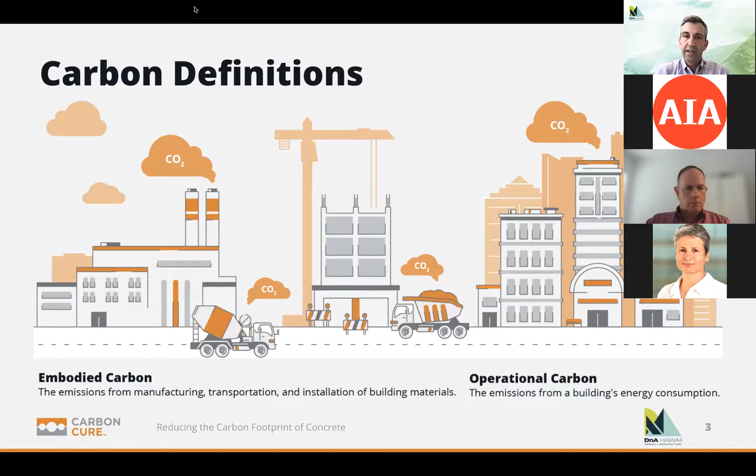And these CO2 emissions have largely been overlooked, and their proportion of the building's overall carbon footprint will continue to rise as we make more and more progress on operational carbon. And that's really where Carboncure is focused, helping construction decarbonize the embodied CO2 emissions, which tend to be some of the harder to abate emission reductions of buildings. So before I begin, I'd like to start off with a quick video made by our good friend Bill Gates that provides more visuals of Carboncure and what exactly we're doing. So please enjoy.

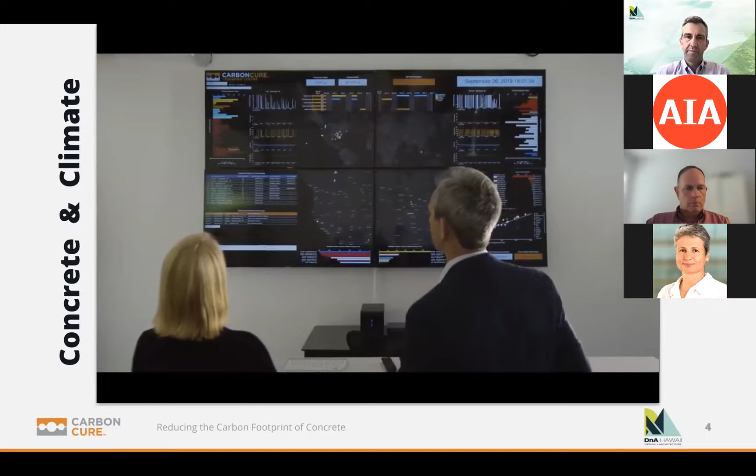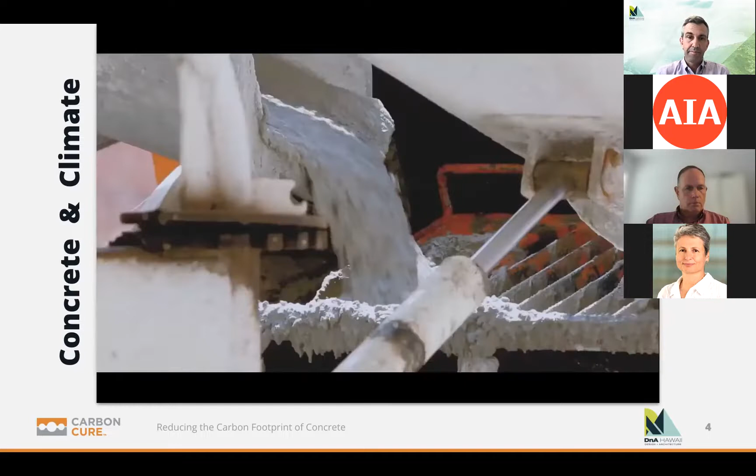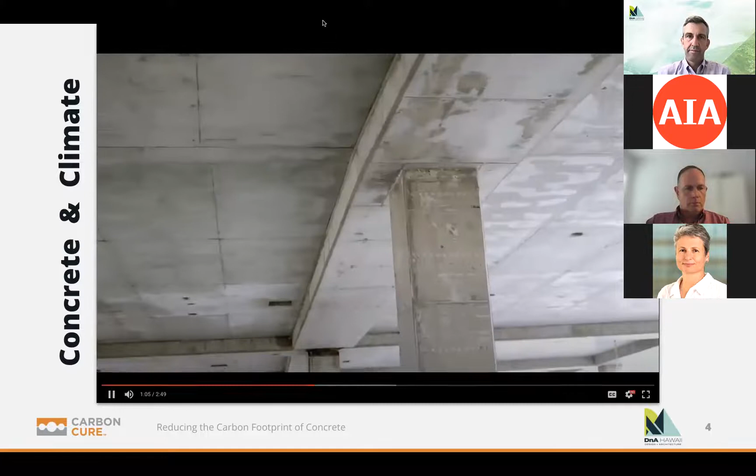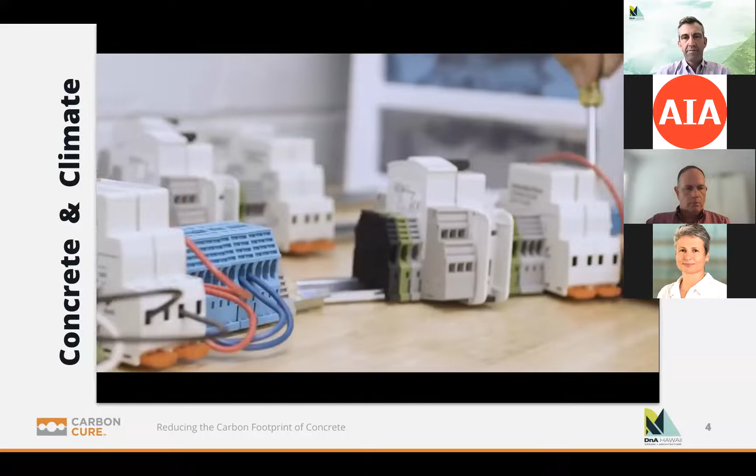The world is expected to add more than 2 trillion square feet of new building space by 2060. That's the equivalent of adding another New York City every month for the next 40 years. Many of these buildings will be made using cement, a massive emitter of greenhouse gases. But a company in Canada discovered an innovative way to reduce cement's carbon footprint. The effects of climate change are going to happen. We're seeing it every day, but this is a solvable problem. Our industry can decarbonize. Cement is the glue, the active ingredient in making concrete, and is the product that we build modern society with. People often ask, what is the difference between cement and concrete? Cement is really the chemistry behind concrete. A simple analogy would be if you're baking a cake, the flour would be the cement, and the cake would be the concrete, the finished product. To make cement, you dig up limestone from the ground, and then you run that through a kiln. Each pound of limestone that you put into this kiln, 1/2 goes up into the atmosphere as CO2. Carboncure is a technology company helping concrete producers transition into the new low-carbon economy. We developed a technology that bolts on to an existing concrete plant. We're starting with a greenhouse gas, a harmful waste product, and we're turning that into value.

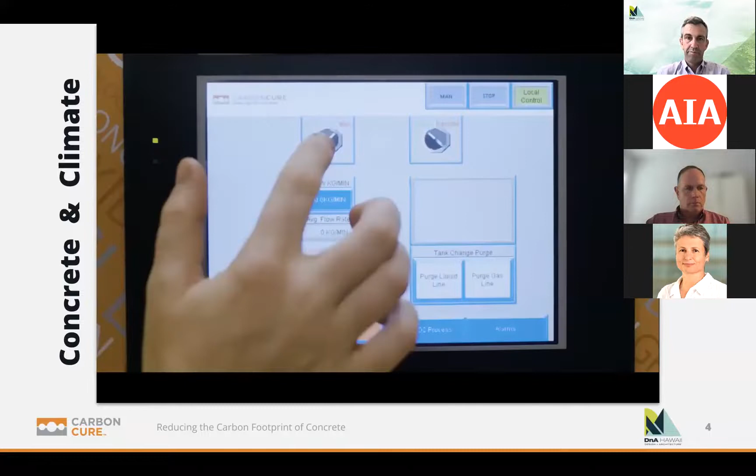We add a small amount of CO2 to react with the chemistry from cement that allows you to create a higher strength concrete. Carbon utilization is not just some abstract idea. It's not just happening in the lab. It's happening in the real world. The concrete industry has worked for years on sustainability, and so now we're looking for new technology.

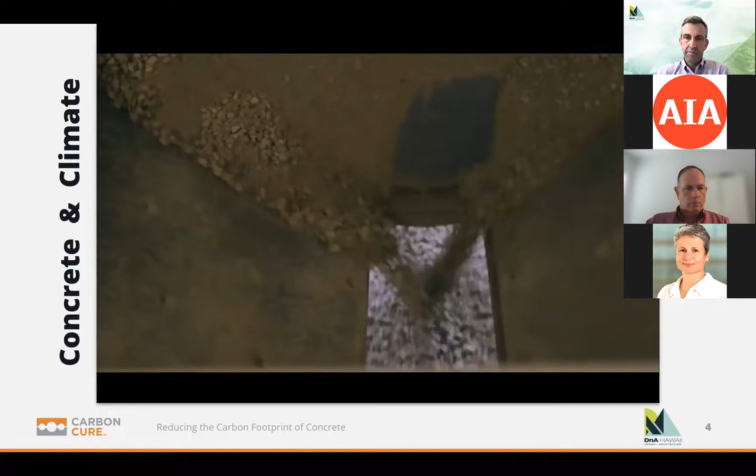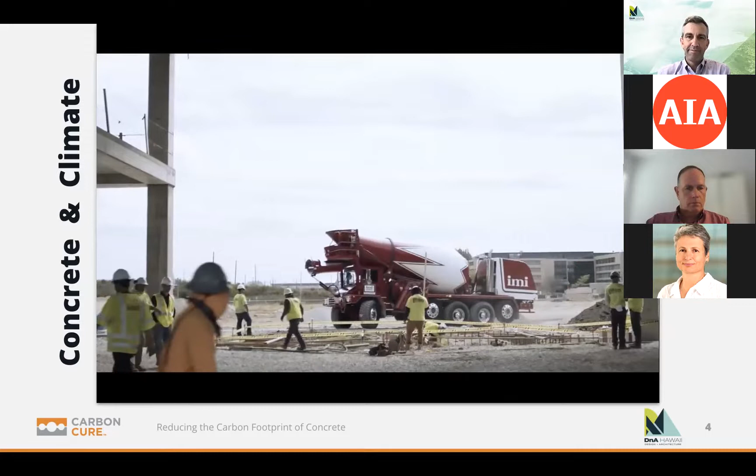And CarbonCure sequesters that CO2 into the concrete, locks it in forever. Then you can actually lower the amount of cement in that concrete. It's really taken hold, and it's building real things that we can live in and drive on every single day, with overpasses and roads, airports, aquariums, or it could even be tech campuses.

CarbonCure is on a mission to reduce 500 megatons of CO2 emissions per year. That is the equivalent of taking 100 million cars off the road, or the equivalent of the CO2 reductions from 500 million acres of trees annually.

We're finding in the marketplace, both with our customers and internally, people are proud to work for someplace that is taking care of the environment. I'm doing it for my family. I'm doing it for my daughter. There's a real human toll to climate change, but absolutely the solutions are there.

Great. I was just thinking my daughter just turned 1 year old yesterday, so it's a good reinforcement, I know, for myself and many others of you who are working in this space. There's a personal and certainly a societal element of working on climate change. So I hope that provided you some background on what we're doing around embodied CO2 emissions and how important it is for us to take urgent action to reduce these emissions.

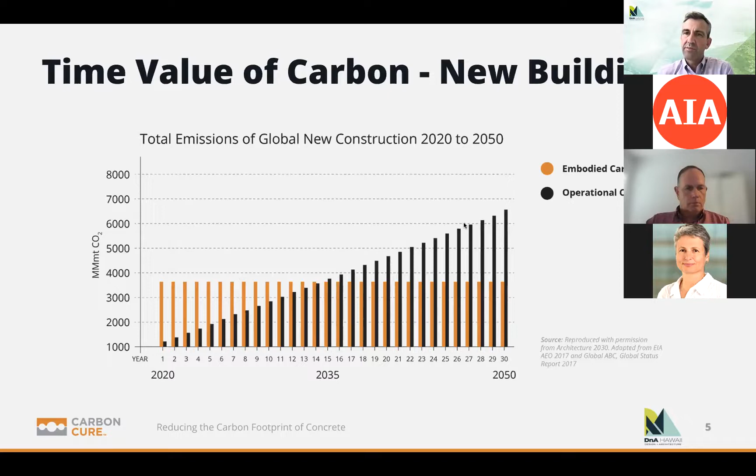And I think this chart that Architecture 2030 put out is a great visualization that shows over time the primary contribution to overall emissions is coming in those first 10, 12, 13 years from embodied CO2 emissions. So as we set targets to meet our 1.5 degree climate targets, being only a decade away, it's really the embodied CO2 emissions and those reductions that are going to matter most. And then over time, of course, the operational emissions will continue to rise.

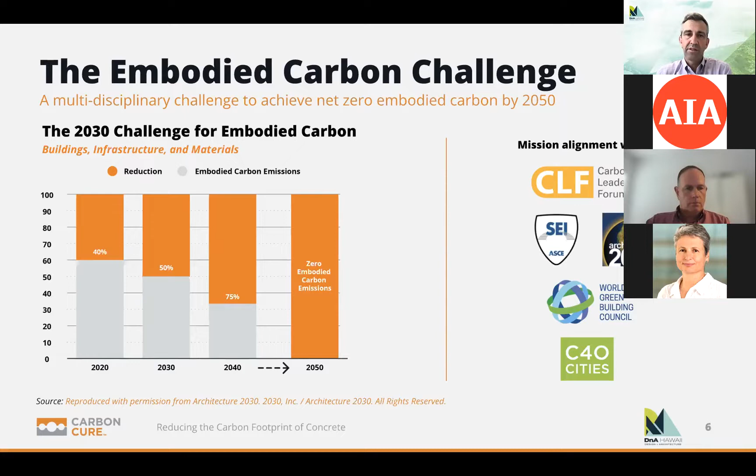So what are we doing going forward? As Bettina had mentioned, we're setting goals and we're reducing those CO2 emissions, and Architecture 2030 and Structural Engineering 2050 have set goals to completely eliminate the embodied CO2 emissions of construction. And that's going to be a stepwise approach year over year, as you can see, where we're going to need to make significant changes to reducing that embodied CO2. And that has to primarily be concrete and other materials as well, but concrete by far is the major contributor.

So I don't know if many of you have gone through any weight loss programs, but it's pretty hard to lose weight, or in this case, hard to lose CO2 emissions if you're not measuring. And that's where there's an important role to play for environmental product declarations, or EPDs. This is like a nutritional label for building materials, which allows designers to actually look at the environmental impacts of materials and make procurement and specification decisions based on actual numbers that have been validated by third-party groups. It also fits within building certification schemes, but it's going to be a key tool for us to drive out CO2 emissions.

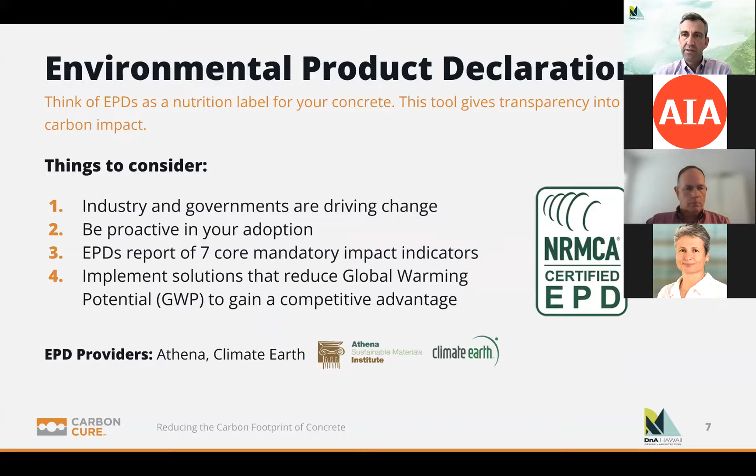So a bit more about CarbonCure, and this is one of our plants in my hometown in Victoria, British Columbia, where you can see that it's a simple retrofit where we work with concrete plants, in this case in Victoria, but HC&D and Island Ready Mix and Hawaiian Cement as well now, to use CO2 in their construction process. And we do it in a very simple retrofit way that allows them to consume CO2 that's sourced on the island. And that CO2 then is injected and mineralized into concrete to provide both material performance benefits as well as environmental.

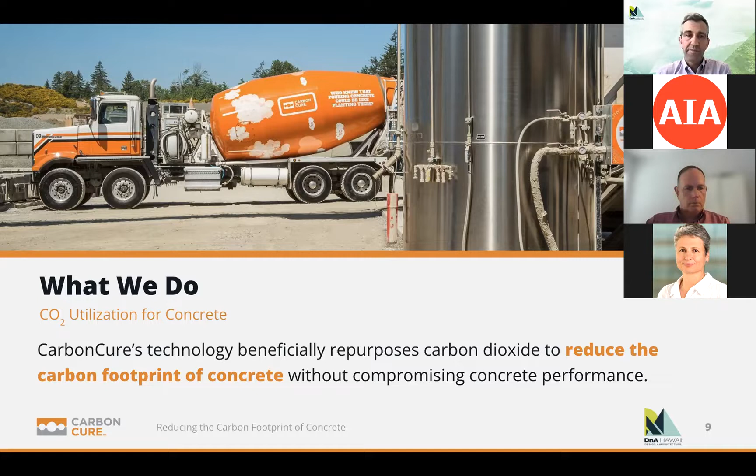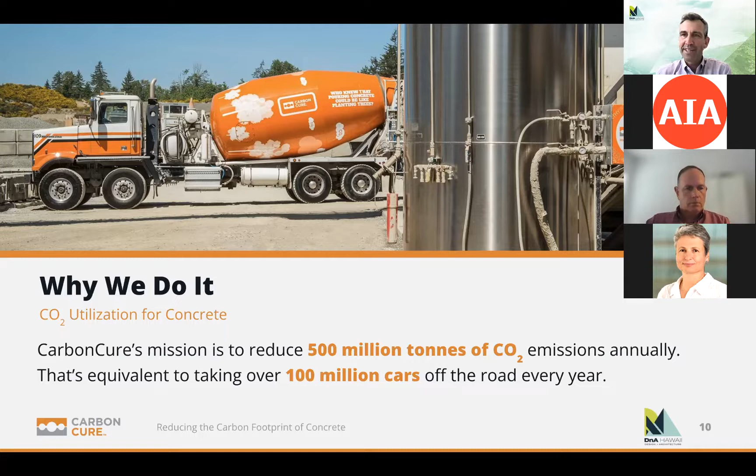And as you will have heard before, why are we doing this? Well, we're doing it to reduce 500 megatons annually by 2030. We're doing that to play our role in helping to decarbonize this industry and helping to make a better planet for our kids as they grow up. So how are we doing? We're still a long ways off. We've now cracked 450 plants that are using this technology, mostly throughout the United States, but are now expanding quickly. And as of yesterday, we are now operating on 6 different continents. And this has been very, very thrilling to see the growth of a technology take hold.

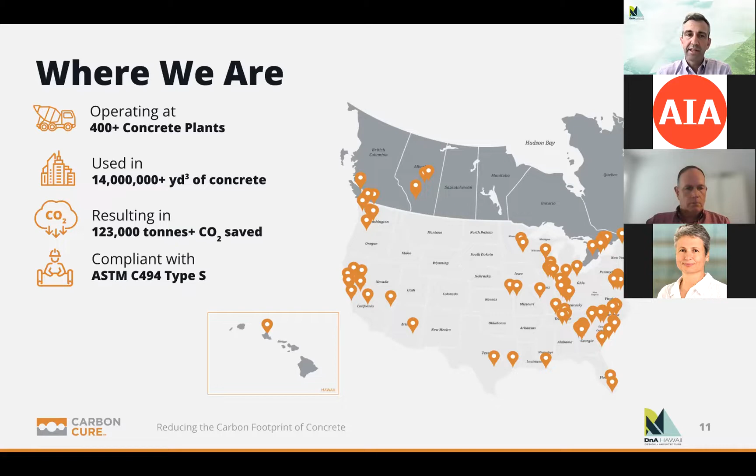We've provided over 14 million cubic yards of concrete to a variety of different projects, just about anything you can think of, that have provided about 123,000 tons of CO2 saved. And all this is doing that in a way that's compliant with existing codes and standards.

We were also recognized this year as the winner of the Carbon X Prize, which was a 5-year global competition to choose the most scalable CO2 utilization technology on the planet. There were 2,000 teams that initially entered this, and we were thrilled last April to be announced as the winner of this

prestigious recognition. The first X Prize was actually won by Richard Branson for commercial spaceflight. It was interesting this year as well to see how he had then taken that to the next level about actually realizing that vision.

Also this year, we just signed the Climate Pledge. So not only are we helping others reduce their carbon footprint, but also looking inwardly. We're making a commitment to ourselves, Carboncure, being net zero by the year 2040. And this year, we're also quite excited to announce that 2021 was the first year that we were completely carbon neutral, and doing that by reducing our emissions, buying renewable energy credits, and then anything else that was remaining, we purchased carbon removal credits.

I just want to provide another short little video here before we wrap up on how actually the technology works, and just getting a bit more detail on looking inside the chemistry and inside the actual production process. So I'll play one more video and then have a few more slides and then pass it back to you, Bettina.

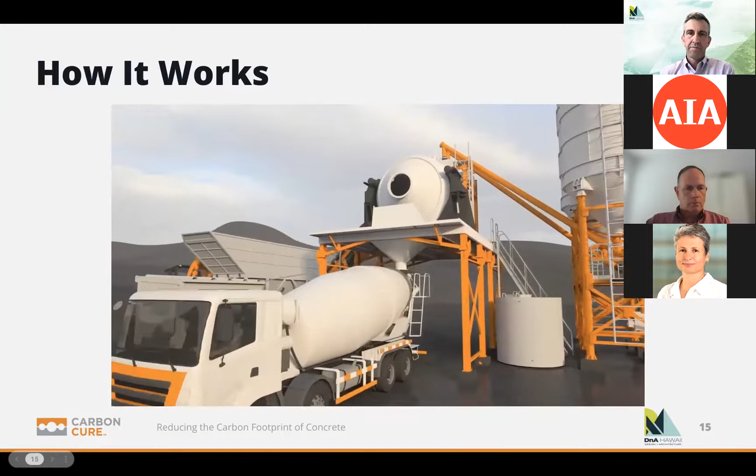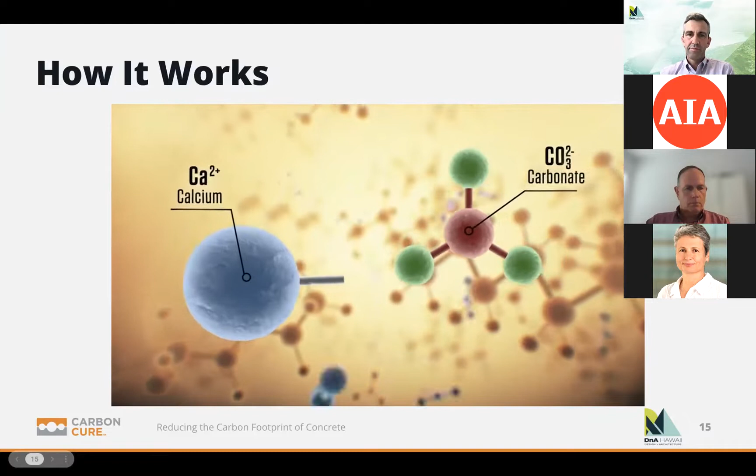The good news is now there's an easy way to reduce embodied carbon in new buildings without making compromises. Here's how it works. Carboncure offers a concrete solution to reducing embodied carbon. Carboncure's technology works by injecting recycled carbon dioxide, CO2, into fresh concrete during mixing. Once injected, the CO2 undergoes a chemical reaction known as CO2 mineralization, where the CO2 converts into a nano-sized mineral. What was once CO2 is now eliminated, never to be re-released into the atmosphere.

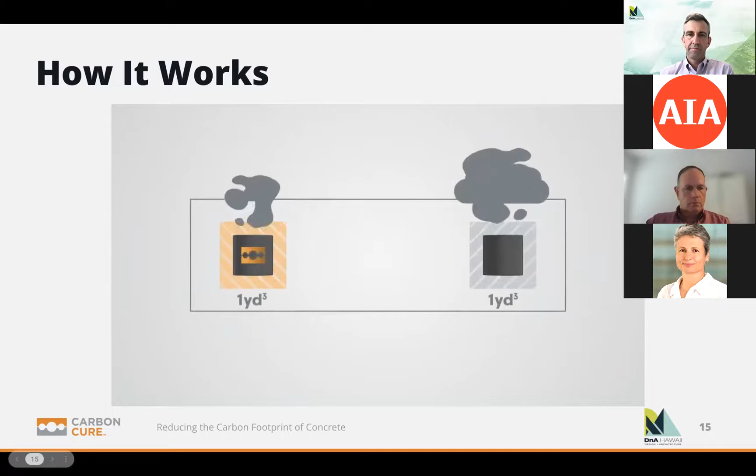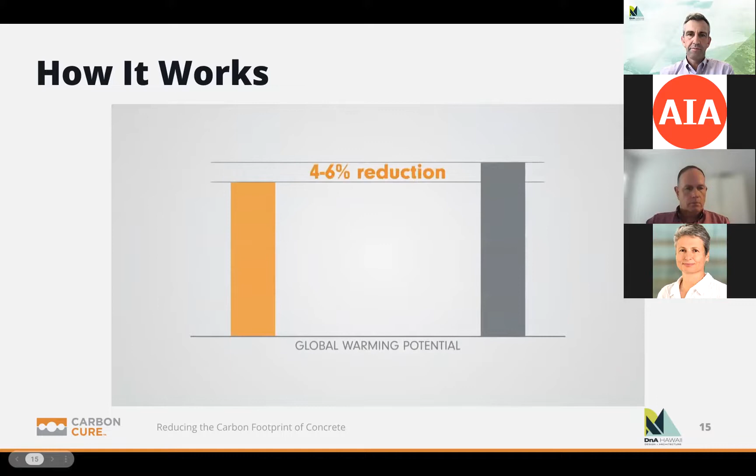Mineralized CO2 improves the concrete's compressive strength, which then enables the reduction of cement content in mix designs without impacting strength or performance. Every cubic yard of concrete produced with Carboncure's technology saves an average of 25 pounds of CO2 emissions from entering the atmosphere and provides a 4 to 6% reduction to global warming potential. An average building built with CO2 mineralized concrete would save approximately 1.5 million pounds of embodied carbon, which is equivalent to the carbon absorbed by 888 acres of forest in a year.

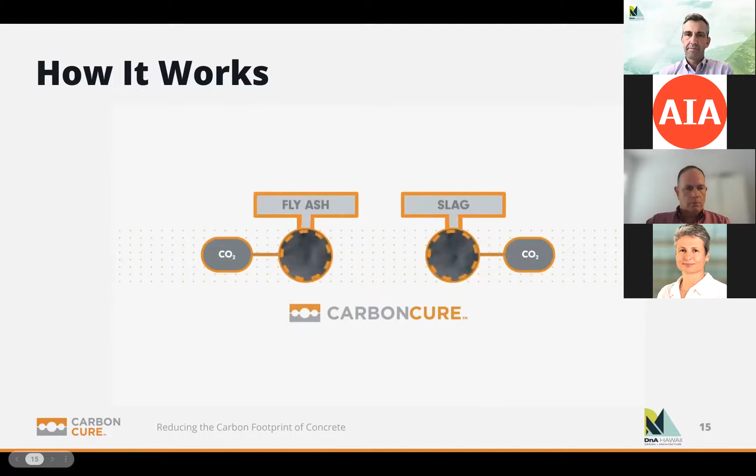Carboncure is compatible with all materials commonly used to replace cement in concrete, including fly ash and steel slag. This allows designers and engineers to stack Carboncure among other carbon reduction strategies for maximum impact, supporting embodied carbon reduction goals and contributing to LEED points.

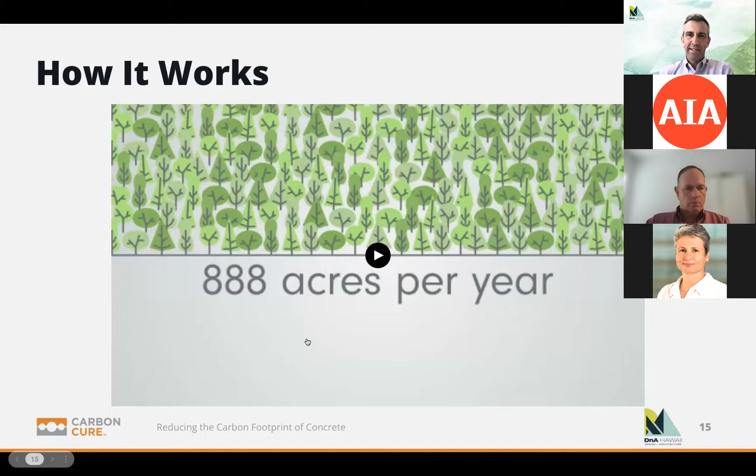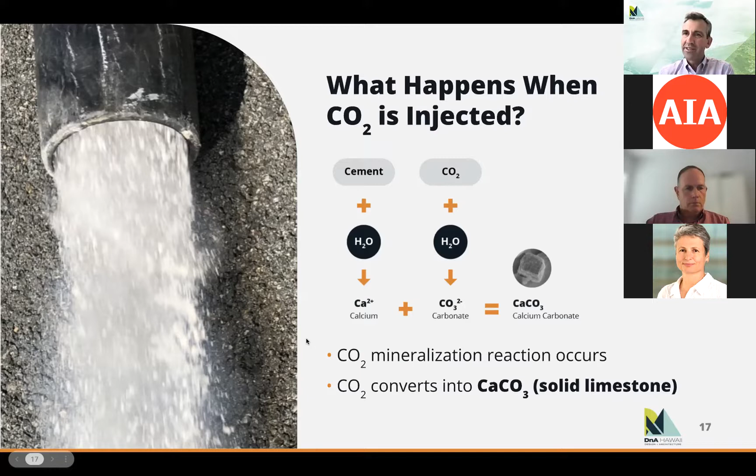Thank you. All right, so what are we doing again? I'm originally a chemist and had developed this technology initially. So as you saw, we're using CO2, which is what we're showing here on the left-hand screen. And it actually looks like snow. So I like to joke that in Hawaii, we're making it snow every day. That CO2 in that snow form is added into concrete to form this permanent mineral.

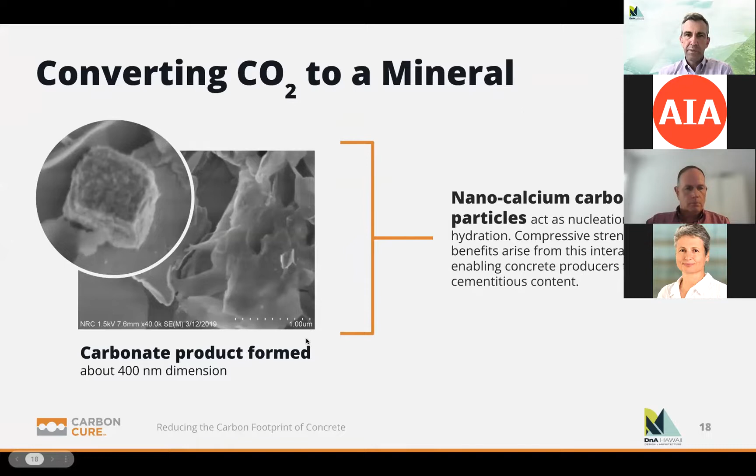And as you can see in this image here of a scanning electron microscope of concrete, it looks like a little sugar cube. Those sugar cubes are particularly important because they act as nucleation sites for the hydration reaction to occur and provide that increased compressive strength. And this really takes us to projects.

So while this is happening at the chemical level, today we're here to talk about this Adler Street project, which is particularly exciting because it's also the highest building that has been made with Carboncure. It was supplied by HC&D Ready Mix Concrete, a local supplier, and resulted in 61.9 tons of CO2 reductions, which is about the equivalent of 76 acres absorbing CO2 for a year.

So we're absolutely thrilled to be part of this project, working with such fantastic partners and doing that in Hawaii, where so many of our innovations and firsts have occurred. And then we take these lessons and these new ideas and spread them around the world. So Hawaii is an especially important market for us, and one that we like to continue investing in.

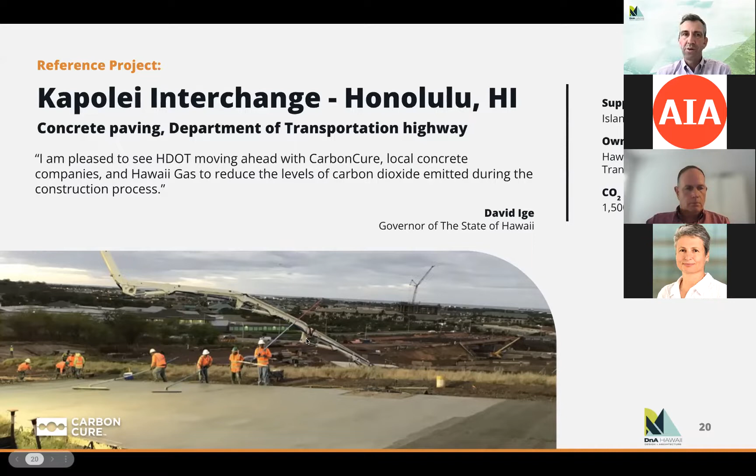One of the more recent milestones as well was on DOT work. There was a lot of national press about the first use of Carboncure concrete on a state DOT project, and that was done here in Hawaii at the Kapolei interchange. In that case, the concrete was supplied by Island Ready Mix, and received a lot of attention by other DOTs, which has then opened the door for many other DOTs across the country, and for that matter around the world, to be incorporating Carboncure into their carbon reduction strategy. So yet again, another first that occurred in Hawaii that's had a ripple effect around the world.

Another really exciting thing, which started a lot of this, is in collaboration with Elemental Accelerator. And we mentioned Aki earlier, who had connected me with Bettina. We were able to also develop new innovative policy models, which drove the adoption, as we've seen in Hawaii today, of these low carbon concrete technologies in a very practical way, with a no-lose situation, where Carboncure has then been able to use on both

public and private projects. This policy model actually won a global award by the C40 Cities Group, where Mayor Caldwell was given this recognition in Copenhagen a couple of years ago for creating this policy model, which has then been adopted by states and cities around the world. So yet another first in creation that has happened in Hawaii that has had these impacts around the world. So we're so grateful to have this opportunity to talk about this project today, and we're sure that it will continue to have major implications.

And this really turns to other projects, and public sector and private sector have a very important role to be, as Bettina had said, urgently looking for solutions to reduce the embodied CO2 of construction. And that can be done first and foremost by asking for data, asking for the numbers, and really making decisions around procurement and specifications accordingly. And then when possible, using your procurement powers to be able to make informed decisions on how you can reduce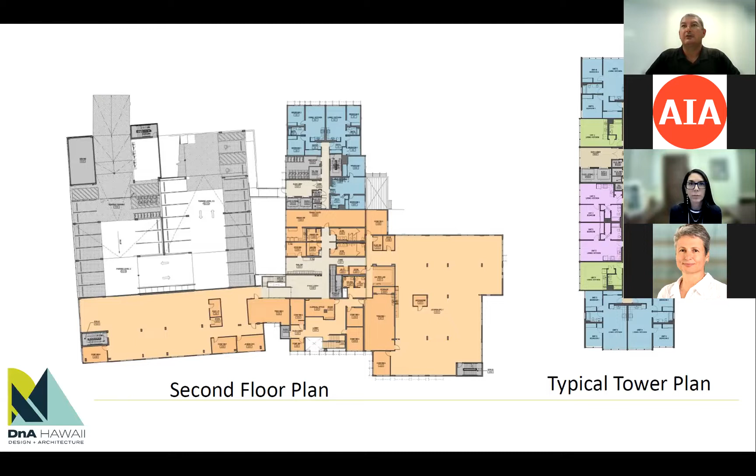The building itself, the tower itself, the blue is 2 bedrooms, and we have 1 bedrooms and studios. Again, about 201 units. Next is just a few renderings of the project. On the left, the Alder Street Judiciary, that's the front entrance, you can see. And then on the Piikoi side is a completely separate residential entrance to their parking and their lobby and towers. And so that's the basics on the project.

I think I'll turn it over to Steve Baldridge. Thank you very much. Can you advance the slide, please?

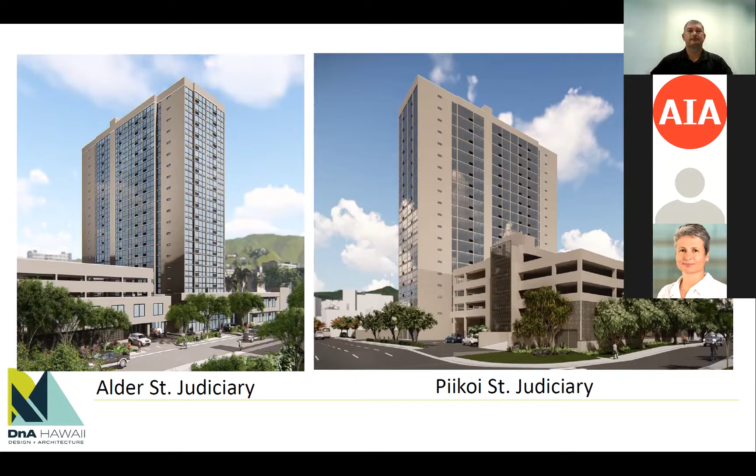So as introduced to this idea here, and definitely wanting to reduce the carbon footprint of buildings, I found a lot of barriers to that. And I like Albert Einstein's quote of insanity, doing the same thing over and over again and expecting different results. So one train of thought I've seen or change in the industry is this fear of litigation, tight design fees, and all the code changes are actually leading to more conservative and material intensive designs.

I don't think I'd want to be doing 3,000 PSI concrete in buildings, but if you look at some of the old buildings in Waikiki, you'll actually find some that have mostly 4,000 and some 3,000 PSI concrete. A lot of times now we're getting 5,000-6,000 PSI concrete, and sometimes 8,500 all the way up the building when it might only be needed in the lower floors.

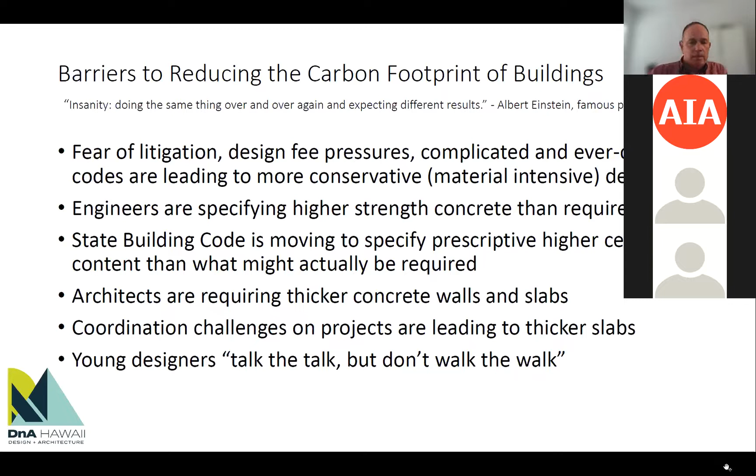So a famous structural engineer back in the 1900s would say strength is essential, but otherwise unimportant. So for us, our concern, of course, first and foremost is safety. And part of that is strength, but it's not the only thing that we have to consider when we start putting something new into the concrete mix. Fortunately, with tunnel form construction, the spans are actually very short and the walls are not heavily stressed, especially at this building height of 20 stories. So the concerns for strength are probably not as critical on this project as maybe something else we might look at in the future. Time is of the essence in construction.

Every day you add to a floor cycle adds time to the overall project, and that adds cost. Sometimes it's trying to get the forms out quicker, and we want to make sure that adding something to the concrete doesn't slow down the curing time. And then, of course, for the folks out in the field actually doing the finishing, making sure that ease of finishing concrete was not an issue for them. And then, of course, the quality of the finish, reduction of touch-up work.

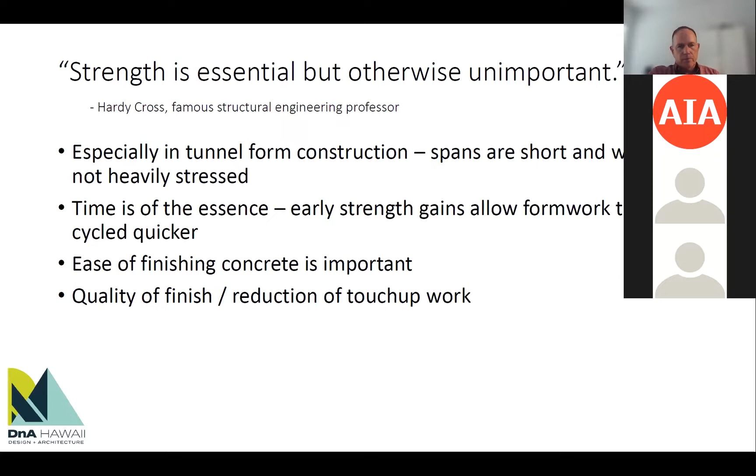I'm giving you all these quotes. This is actually a quote I had from my grandmother. She also said money doesn't grow on trees, but I say concrete doesn't grow on trees. And we need to be careful about not using too much of it. So first, reduce carbon content essentially just by reducing the amount of concrete used on a project. Secondly, we look at what concrete strength we're using. Can it be reduced? Sometimes there's a diminishing return of higher strength concrete, and we don't need to use it. Do we cycle it back down 1,000 PSI or something?

And then are there ways to reduce cement content in the mix design while maintaining required strength, durability, and other performance metrics? In some areas, like LA, which has very weak aggregate, they've actually been shipping in an Orca aggregate from the Vancouver area to help get the strength without putting more cement into it. And this is where it'd be good to get involved with the concrete producers in the islands and take a look at what they're doing to get the same strength with a little bit less cement. And that's where we come to the tool that we're talking about today, which is CarbonCure, reducing the cement content while still getting the strength that we want.

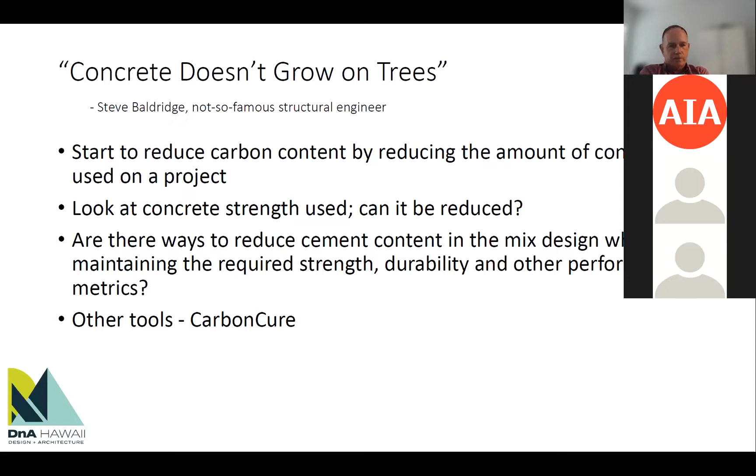And I think Robert said this as well. You've got to measure things and see where things are going. And we do that on all our projects. So we take a look at the cubic foot of concrete to square foot ratio. How much concrete is in a building? And actually, these numbers are interesting because 1.0 means that you have 12 inches of concrete for your average thickness of concrete throughout the building. So that's walls, floors, and everything else combined. Of course, rebar has its own carbon impact, and post-tensioning, so you want to minimize those as well.

An interesting question came up about tunnel form because there is so much concrete that you see in those buildings. The buildings in yellow under the concrete are all tunnel form buildings. And it's interesting to see that they're not actually that much different than a post-tension building. Part of that is because a large percentage of the concrete usage in the building is actually in the horizontal work. On a post-tension building with longer spans, you might have 7 to 8 inch thick slabs, whereas in a tunnel form, you can go 5 to 6 inches fairly easily. The walls aren't as thick. There's more walls, but they're just not as thick.

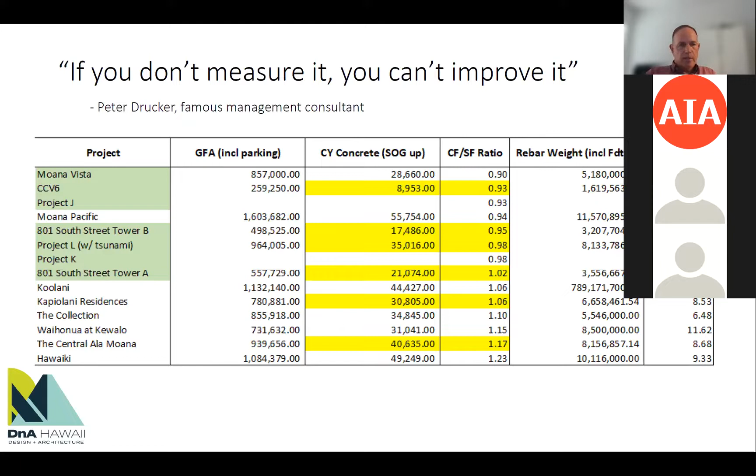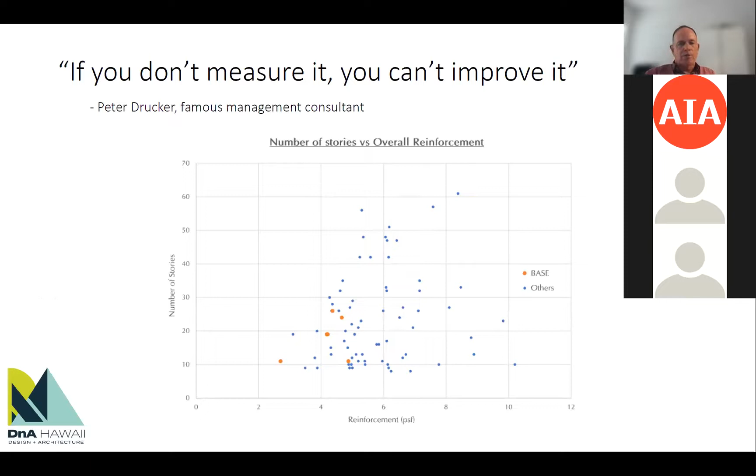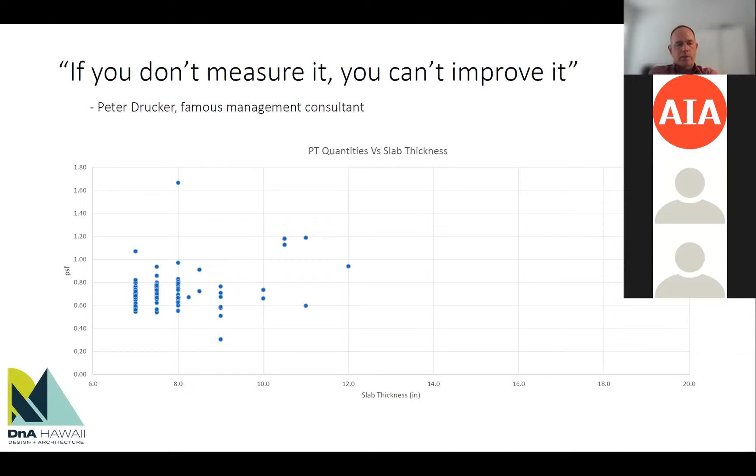And we do this throughout all of our offices. So we're checking different values for rebar. Next slide. PT quantities versus the slab thickness. We've done some studies looking at longer spans to see if they make a difference, especially in podium parking structures. And what we found is that there's a lot of concrete in the deep foundations that we need in Hawaii to get the capacities with the soils that we have. And we've actually found that sometimes going a longer span doesn't really add that much concrete to a project if you look at it close enough.

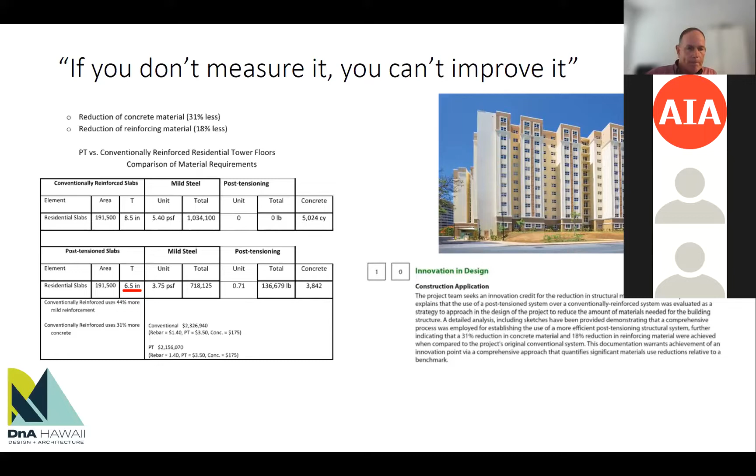Next slide. All right, I have to pass this off to ACK. Michael. Hi, thanks, Steve.

So I put together a little case study on the Alder Street mixed-use project. Again, my name is Michael Young with Albert C. Kobayashi Inc. We're the general contractor on the project. We've been working with Alana and her team for actually a couple of years, prior to the start of construction. But actually in July 2020, we were first introduced to Carboncure as a potential to be used on the project specifically. This was challenging because, if you look at this slide, our start of construction was scheduled for October 1st, 2020. So basically a couple months before.

Alana came to us and said, hey, do you think Carboncure can be used? So, with any other new technology that's introduced, we do a lot of due diligence. So we started first by researching how it's been used in Hawaii. And we learned that it was successfully used at a project, highway paving out in Kapolei, supplied by Island Ready Mix, and it was actually built by Goodfellow. And so we did some due diligence and spoke with them about their experiences. We did some research with Carboncure, and we talked to some of the larger concrete suppliers. There's only a couple concrete suppliers in Hawaii. And so we spoke to all of them about the potential to use Carboncure.

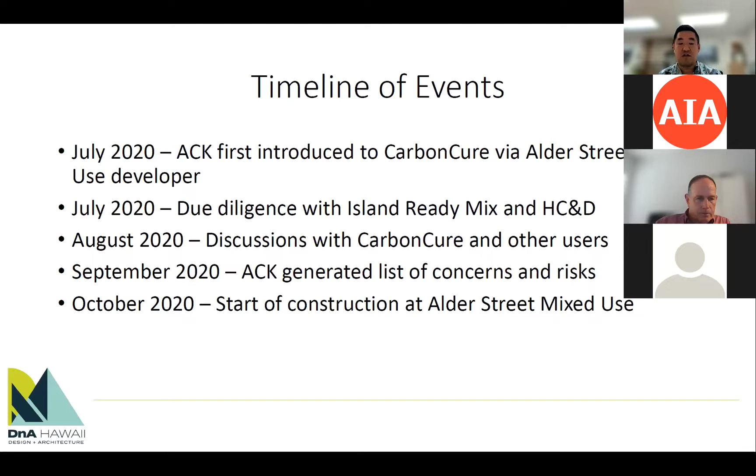And at that point in September, we generated a list of concerns. Steve Aldridge just previously listed some of them, but we did make a list of concerns, and the timeline was tight because we had to make a quick decision. We're going to start construction in October. Next slide.

So here are some of the concerns we came across, not only ACK, but in conjunction with our team members, our subcontractors, a concrete supplier, the engineers, the entire team. But like with any new technology, there is limited data. So with concrete, we want to make sure that the building is safe, the building is performing as designed, and with high-rise structures in particular, concrete and structure is a big important part of it. Unfortunately, there was limited data on Carboncure use in high-rise structures, no data in Hawaii, no data on tunnel form projects. I think we tried to research around the nation if Carboncure had been used.

So we had a hard time finding, through our due diligence process, good data. Previously, like I mentioned, the only use in Hawaii was for slab on grade work, which is much lower risk than elevated, suspended slabs and walls. Along with that, the testing data for Carboncure injections was limited for the concrete we were looking for. We were looking for a 6,000 psi concrete mix. Most of the applications we found were 4,000 or 5,000, which is more common in buildings.

But because it's a high-rise project and we had a very tight schedule, an aggressive schedule with the tunnel form construction, we actually had a 6,000 psi mix that needed to hit 2,500 psi strength in 18 hours, and that strength was required so we could dismantle the forms and move them up to the next floor to keep the cycle going. The one floor a week type of cycle you see on high-rise construction, particularly in Hawaii. So we had concerns there. Like with many other materials, there is limited supply. So at the time when we were researching this, there was only one supplier of carbon dioxide, Matheson, and so there were obviously concerns with supply chain.

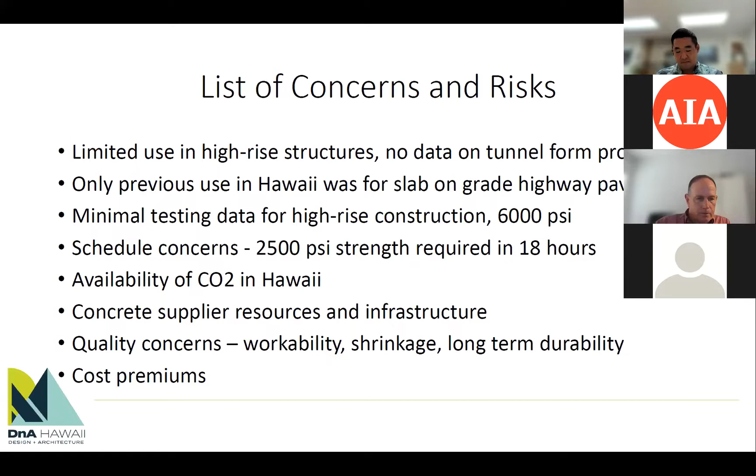Next slide. So that sounds pretty pessimistic. And to be honest, maybe in September 2020, we had quite a challenging, pessimistic outlook, given the schedule we're up against, along with the factors that I just mentioned. So we had a big stakeholder meeting in November of 2020 with Alana and her team, HC&D, the concrete supplier, ACK, some other players. And we decided that in order to make this happen, we'd have to put in place an implementation plan. We rolled it out basically little by little, and I'll describe what we did and what the results are. But the only way we felt that we would all be comfortable using Carboncure on this project was to use it over phases in increasing amounts, and I'll discuss that next.

So we actually started right after that in December 2020 with concrete pours on the Alder Street mixed-use project. So we moved pretty quickly on this. Next slide.

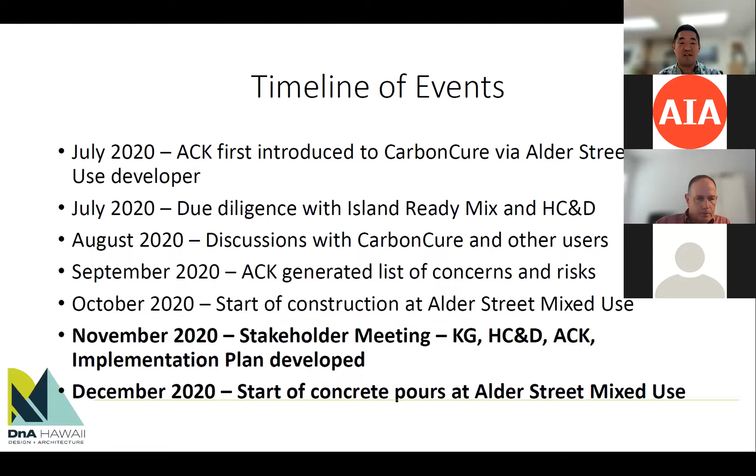So we put together a specific implementation plan. As I think Rob mentioned, the intent of CarbonCure is to inject the carbon dioxide and then to remove cement. But in order to do that, it needs to meet strength, it needs to meet quality, it needs to check all the other boxes. So we determined that in the high-risk areas, we would take a very conservative approach. So the auger cast piles, the foundation of the building, we didn't touch the specialized mix design. We just left them as they normally are installed in Hawaii.

On the pile caps, we injected the CarbonCure, but we didn't reduce any cement. At the slab on grade, we did a 3% reduction instead of the desired. The desired reduction, optimal reduction, is 5%. So at the parking, and then the slab on grade, we did 3%. In the tower, as we moved up the building, we started with no cement reduction. From floor 7 and on, we went to 3% reduction, and then from 13 and on, we started going to 5% reduction in certain areas, particularly at curbs, some low walls and other places. But we started increasing the cement reduction over the course of the project.

So a very phased approach, something you would probably see in an R&D type of project, but given the risk that we're up against, we felt that this was the best way to implement it to protect what was important, and keep the risks mitigated, as well as take this opportunity to really experiment with this new product. So we did have, along with that, some significant testing, which I'll cover, by both BASF and HC&D throughout this process.

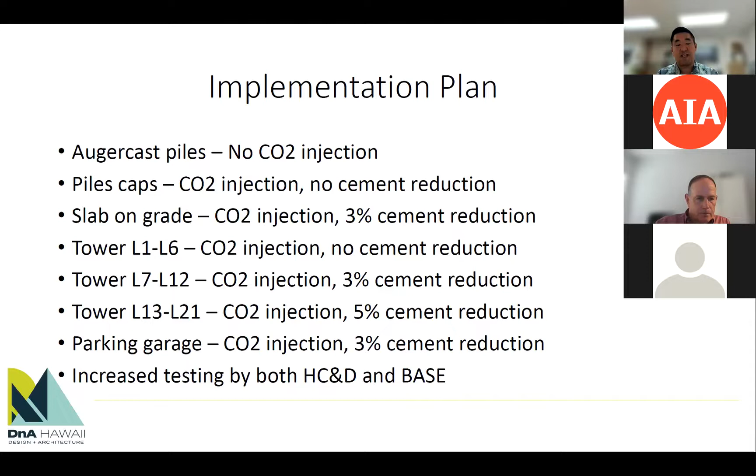Next slide. So this is a visual of our implementation plan. As I mentioned, the green would be the 3% reduction. The brown in the lower floors was just injection only. And then on the upper floors, we started to progress to a 5% reduction in some areas. And so you can see we did a phased approach.

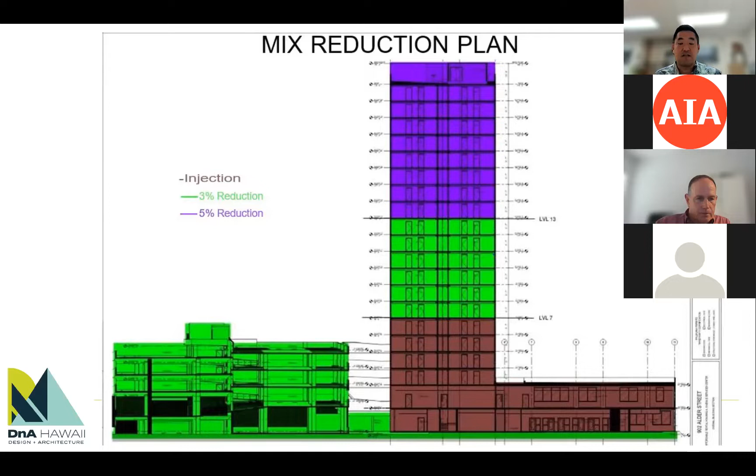Next slide. This is our typical pour plan. I think the typical floor is about 9,500, 10,000 square feet. So we're talking about 3,000, 3,500 square foot pours. And tunnel form construction, as many of you may know, is driven by cycle, driven by speed. That's one of the big benefits of tunnel form, is the typical nature of the construction and the speed production you get out of it.

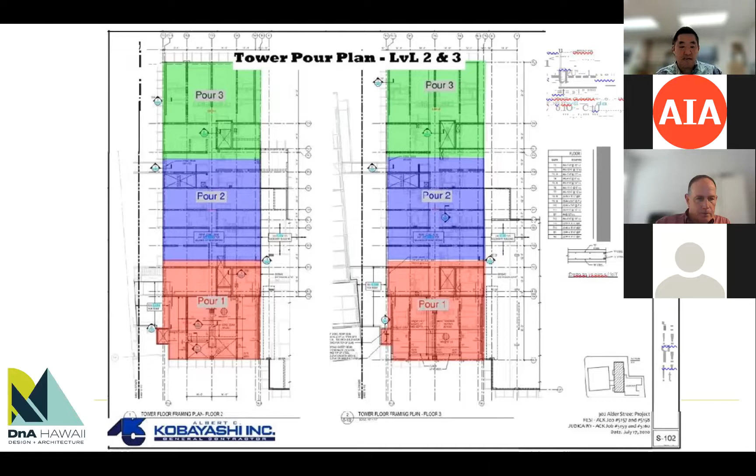It obviously took the course of the project and a lot of testing data to draw this conclusion, but a really good feeling coming out of this project. We just topped off 2 weeks ago, and the data we're still seeing has been very optimistic in terms of reaching strength while reducing cement.

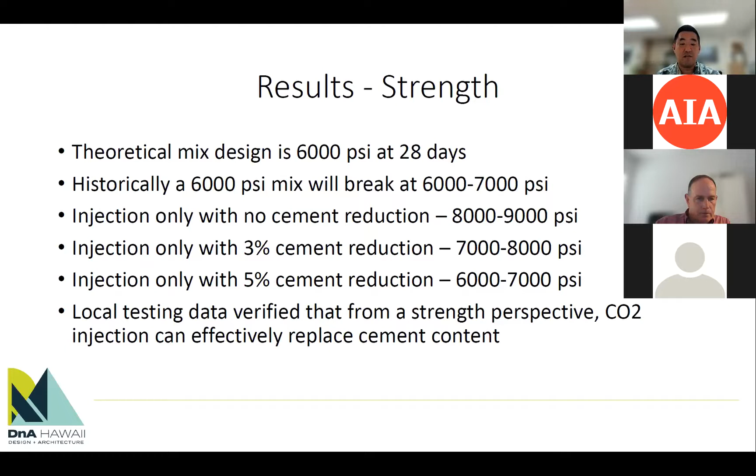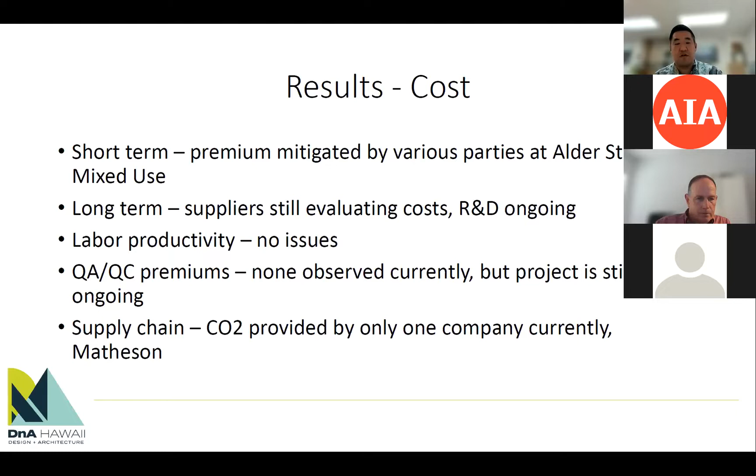From a QA/QC and a production perspective, we didn't see any major premiums. We discovered that the concrete was performing quality-wise. Our guys in the field said they were hitting the same workability and productivity regarding the material with the CarbonCure injection and cement reduction. So very good results from the Alder Street project. Next slide.

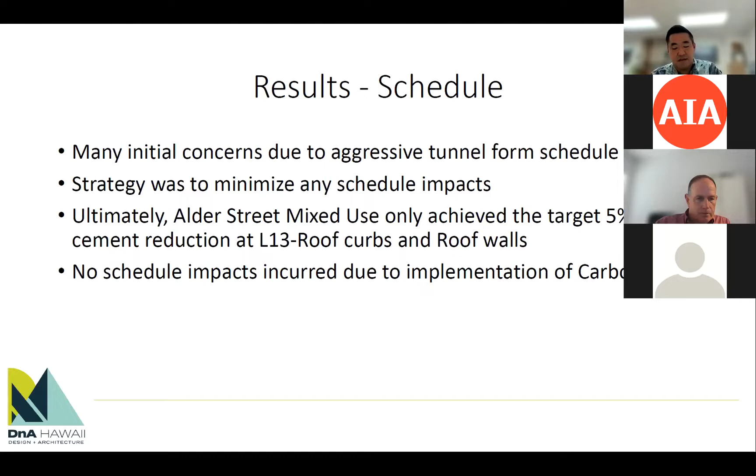So lastly, in conclusion of the case study of this Alder Street mixed-use project and a more general discussion about innovative technologies, particularly in Hawaii, there's always a lot of risk. We're a contractor. We're always in the business of trying to reduce and mitigate risk. So new technology introduced 1 month before the start of construction understandably is going to cause some concern by a lot of us. So I commend our team, starting with Alana at the forefront. To get this implemented and done was a big challenge, but it took a commitment by all the stakeholders.

Steve, both Steves, HC&D, CarbonCure. We all had to work together. We had a lot of discussions. We had a lot of communications, and we were very honest with each other about the concerns. I called Alana many times and I said, I have concerns about a lot of different things, and I'm not sure if this is going to happen, but she kept pushing through. She kept persisting and saying, we got to find a way. And we agreed to share liability risks. We agreed to share cost risks.

And I have to thank everybody in the community. We got a lot of help through the due diligence process from other engineers, from other contractors using this product, other suppliers. It's been great. And that's really the reason we were able to get this done. So thank you. Thank you to everyone in Hawaii and everyone else involved with CarbonCure. That's all I have. Thank you.